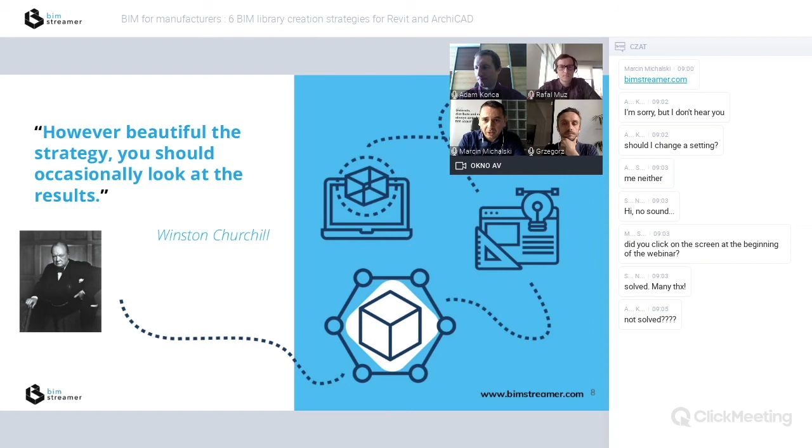Ladies and gentlemen, on this particular webinar we're going to show you the results. But before we do that, I would like to structure the information we're about to share with you, because we are going to present quite a lot of information. So before that, we'd like to tell you in which classification we're about to present these strategies.

First, we divided the strategies into groups. Group number one refers to content which is specific, non-geometric. The latter is geometric. I think you're more familiar with the geometric part, especially the majority of the audience. However, there is also non-geometric content, like different kinds of materials, paints, structural layers, which we'll also cover during this webinar. When it comes to geometric, we subdivided further.

When it comes to subdivision of the geometric part, we came up with two main approaches. The first is that we're using the same content for all platforms. We're focusing on Revit and ArchiCAD today, but some strategies can also work with other platforms like Allplan or Vectorworks. But let's focus on Revit and ArchiCAD in this particular episode.

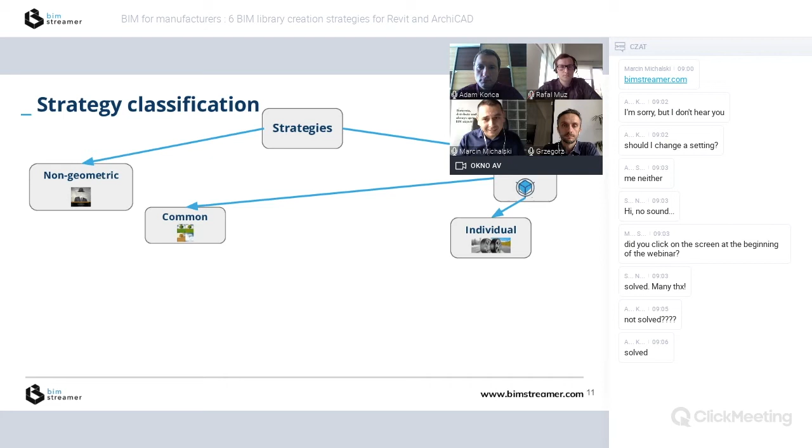The latter subcategory is individual - these strategies prepare individual libraries, native files for each and every platform. But this is not the end, we decided to subdivide it further. So the common strategy was divided into two next subcategories: one is reused, and the other is custom.

The reused approach is when we're reusing existing BIM, or in this case CAD files, which in most cases were used for fabrication. They were created in some sort of CAD systems like Inventor, SolidWorks, Solid Edge, Creo, name it. It's possible to convert them into interoperability formats like STEP or 3D DWG, which later on, through some intermediate conversion, can be converted to BIM formats.

I also mentioned Inventor, but we decided to cover Inventor as a separate strategy, and I'll tell you why later on, not to bore you with this information when we're talking about classification. The other subcategory is custom.

Custom is when you're planning to prepare a custom model, custom content, custom object, especially for the purpose of BIM, but you don't want to prepare them in both Revit and ArchiCAD independently - you'd like to have a single file. So for this strategy, we came up with two types.

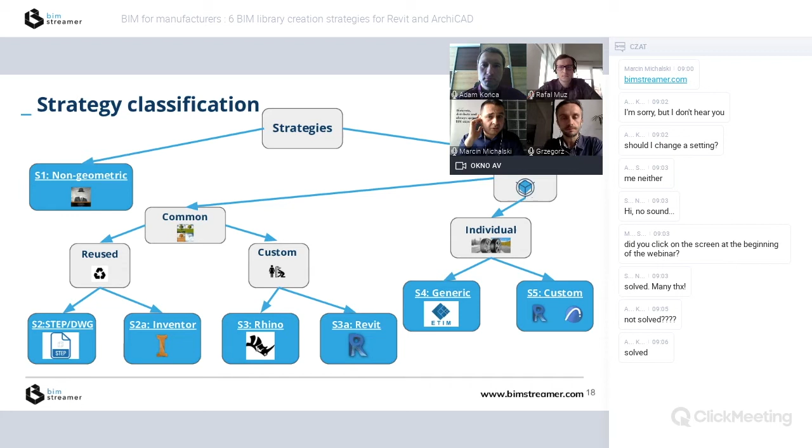Okay, so right now we're going to present the first strategy, followed by the next one - S1, S2, S2A, S3, and so on. Each strategy will first be presented by Adam, and later followed up by our experts. So Adam, I'm handing you over the stage, and you can start with the non-geometric strategy.

Okay, thank you very much, Marcin. As we heard, we have plenty of scenarios to show today. As Marcin said, we used hundreds of hours to prepare it, but we did it.

However, I'm pretty sure that you are more interested in the comparison of these scenarios. So let's go quickly through the intro. In the middle, we have the BIM Streamer platform, which allows us to combine the models and the data.

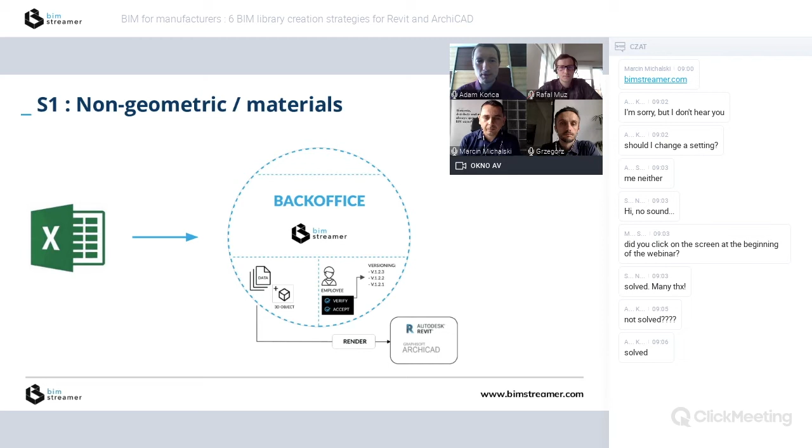In the first scenario, however, we don't have geometry. As Rafał told me yesterday, manufacturers very often call it stuff. So in this example, as input data, we have just the Excel with the data. And as a result, we have the dedicated RTE file in Revit with created materials, and for ArchiCAD with materials.

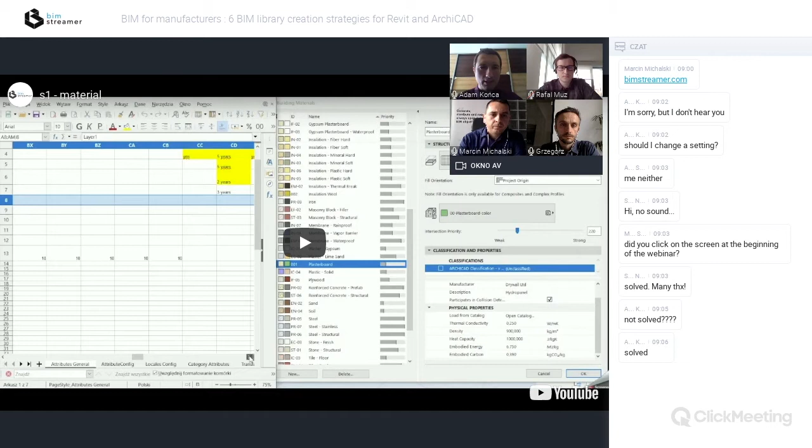Okay, let's play it. As this is the first scenario, we will start with presenting the whole process in the BIM Streamer. So we select the families for the synchronization. We can see they have been queued and synchronized. When they are finished, we are accepting them and publishing to the online library.

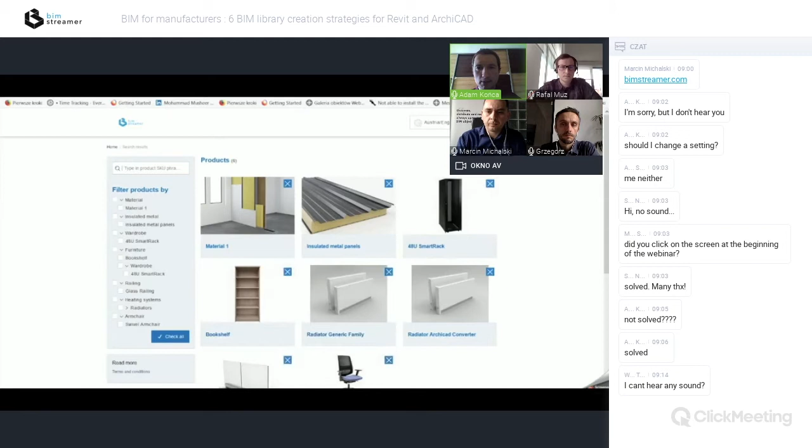We are selecting the appropriate channel, accept, and now we are on the online library and we are selecting the synchronized families and adding them to the basket. In the basket, we are selecting the Revit and ArchiCAD files for download.

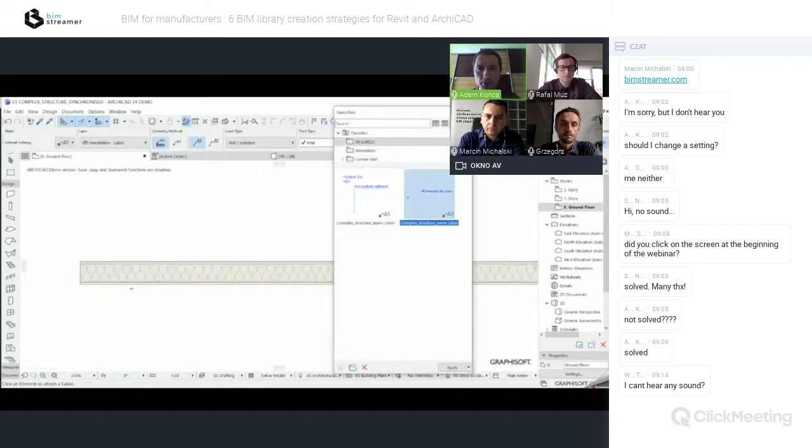And now we can see the created PLN file in ArchiCAD. And soon we will open the attributes for the created materials, and we will compare them with the data we have in our Excel sheet.

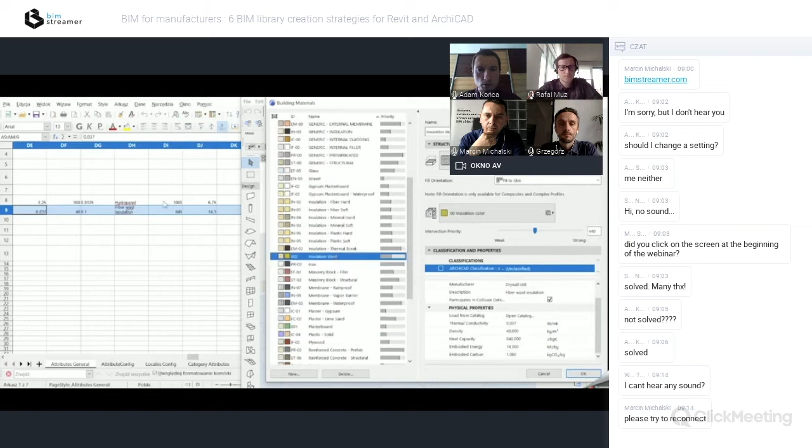You can see that the plasterboard, this is material 1, which was created. And now we are scrolling. Here are the attributes in the Excel sheet and the attributes in ArchiCAD. And the second material, insulation wool, and the injected attributes for that material.

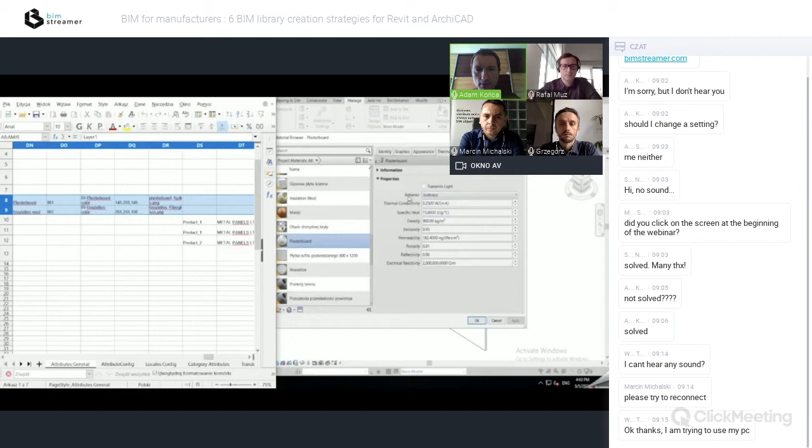Now let's skip to Revit. We are scrolling through the attributes in Revit, and soon we will see the materials. Yeah, here we have the materials in Revit - plasterboard and the attributes that have been updated. And the second material, insulation wool, and the updated materials.

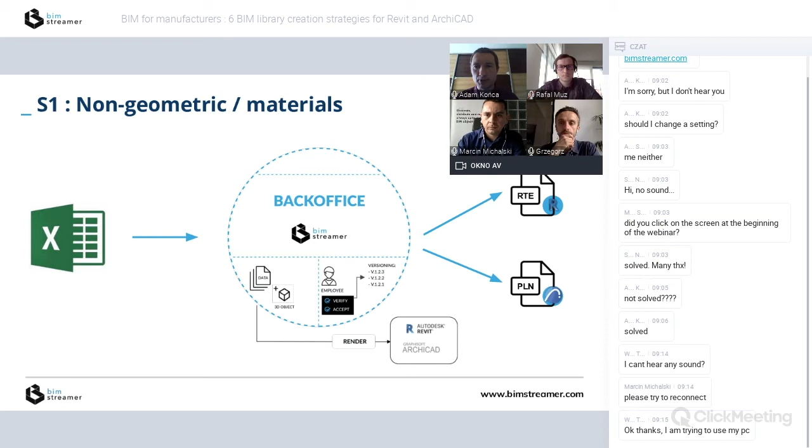Adam, if you could also clarify to our audience what synchronization is, because for some of them it might not be so obvious. Synchronization is the process in BIM Streamer which creates the BIM files. It usually takes the master models in Revit or ArchiCAD or both, and the data from some kind of source. In this example, the source of the data is the Excel sheet. However, in this example, we didn't have the models as an input parameter because we were just creating the materials, which does not require it.

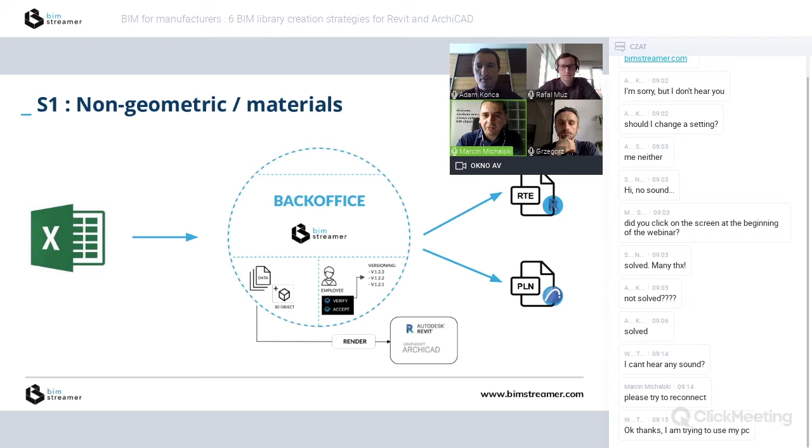Okay, so I think that this was the presentation of strategy number 1, S1, and I think it should be followed by some sort of recap from our experts. So I will ask maybe Rafał if you could put more light on the findings from this particular strategy.

Yeah, sure. So actually, for the first strategy, for non-geometric products, clearly the geometry input is not required, so that's a big plus. Only the information about a product is actually needed to create such BIM content, and it's a relatively quick solution. Some of the drawbacks - the big one is that it is very limited to a certain type of product. And which product is it?

As Adam also mentioned, for me this kind of strategy is very much applicable to everything that we could consider to be stuff, right? Materials. Think about it as paint or insulation, roofing, etc. This strategy is not very good for things that would be products - elements that I would consider to be things. Think about a door, a lighting fixture.

So basically, when we're talking about strategy number 1, I think it's worth remembering that it's a good one for everything that we measure in either buckets, liters, and bags. And it's not very good for things that we measure as either linear meters or pieces. Okay, thanks for the explanation, Rafał. I think that we can move on to strategy number 2. So Adam, the stage is yours again.

Okay, let's go through scenario number 2 quite quickly. In this example, as an input file, we have an existing STEP file. And what we can do with such a file is convert it, for example through Rhino, to SAT and 3DM files, which can be used as input models for Revit and ArchiCAD.

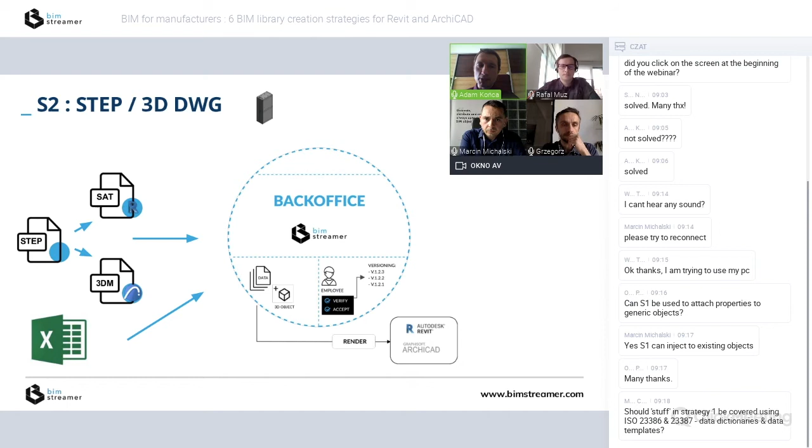SAT files might be converted automatically in Revit to RFA during the synchronization process. However, there might be some kind of issues during such conversion. So we recommend doing this conversion manually and preparing this RFA manually just to check and be sure that the resulting master model in Revit is good enough.

Similar to the other scenarios, we will have the result files in Revit and ArchiCAD. In this example, it will be RFA and GSM.

Marcin, if I can ask you to start the movie number 2. I'm trying right now, give me a sec. Let's start movie number 2.

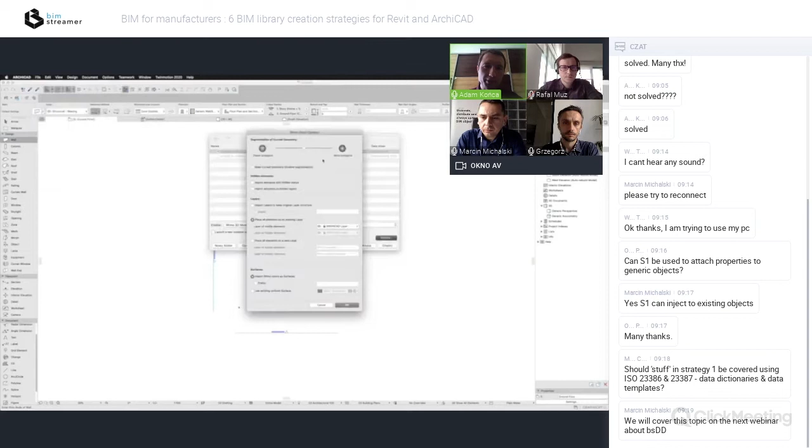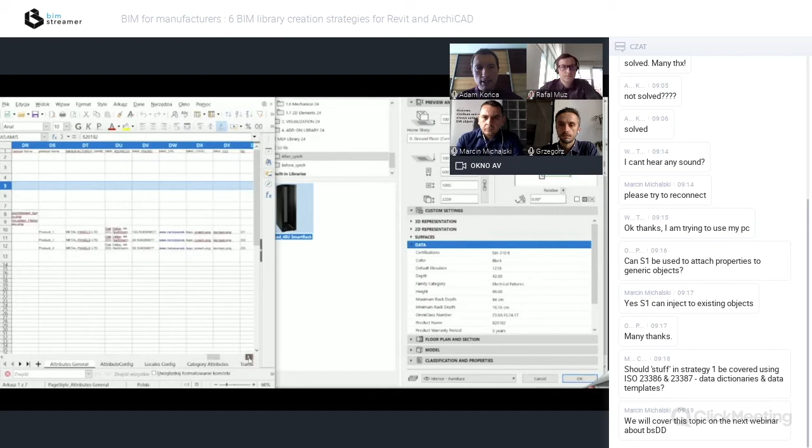Such created files we are using for the synchronization. Now we jump to check the result file after the synchronization, and we are checking the attributes in Excel file, and you can see that attributes in ArchiCAD were injected. Now we are comparing the Revit file, and you can see that attributes have been injected to the dedicated sections in Revit as well.

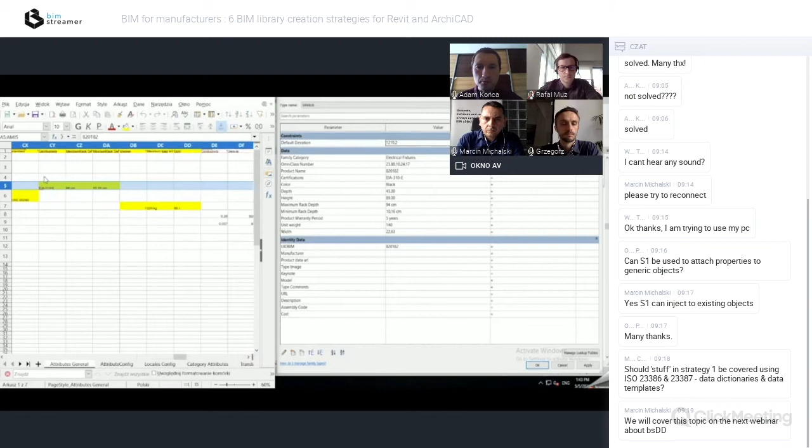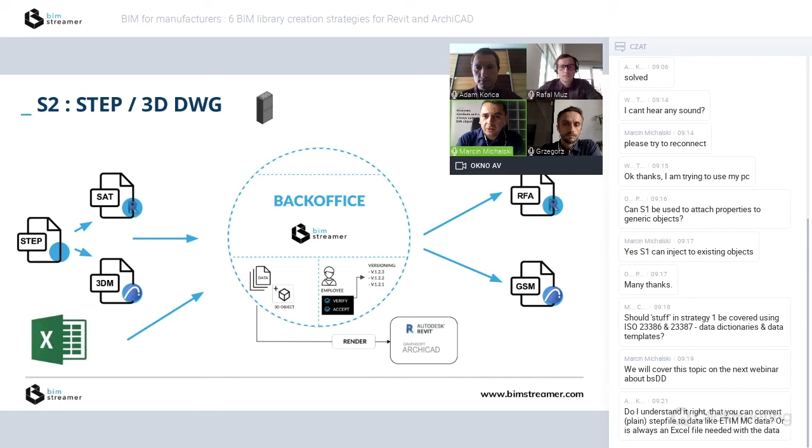I think that's all, we can get back to the presentation. Okay, so I think that was more like the presentation of the strategy S2, and maybe now I would like to ask for a comment of Grzegorz, if you could put a bit more light on this strategy.

Yes, well, this strategy uses the step files, which are typically used as an exchange format, and they are good for covering many exchanges between designing platforms. In some way this is the first format when the manufacturer decides to create the BIM content. This is the first asset they have from their design department, and very often when we start to talk about creating BIM content, I can hear that, okay, we have 3D files, can we use them?

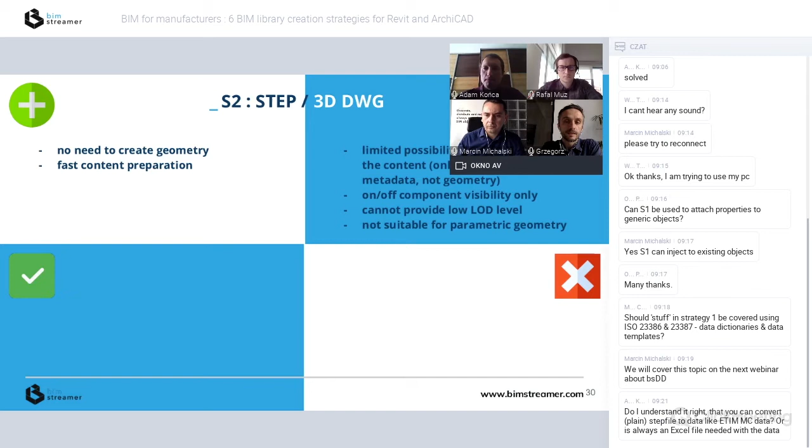And the step file is the solution that could be this first step with creating this content, so it is possible to create it in short time. We can create the first BIM content, so there's no need to remodel it. But the problem with this approach, as well as with 3D DWG files, is that we cannot do much about parameterization of such models.

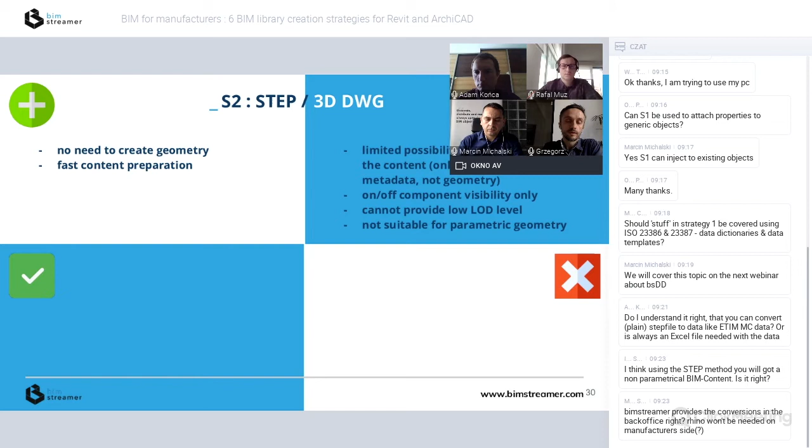And another thing is the limitation. Very often those files are very complicated, since they are fabrication models. They have many construction and structural elements that are irrelevant from the point of view of the BIM authoring tool user. So very often when you create a Revit family or ArchiCAD library part, it appears that it's very heavy, might be as heavy as half of the whole project.

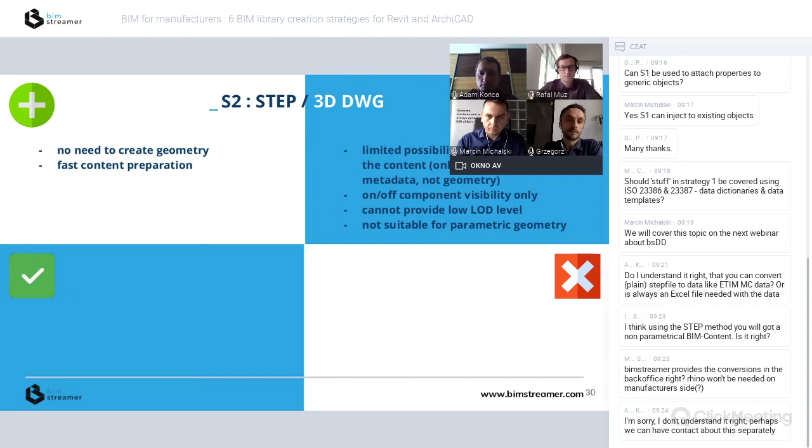The other thing with the limitation is that, as I said, we cannot do much about parameterizing this, except for simple material changing or turning on or off some part of geometry. But we have to do it either in some middleware or directly in Rhino. Anyway, we cannot directly import it to a BIM authoring tool, we need middleware software for that.

So it's good to be used for object types like furniture and interior equipment, which are in fact static, and the only parameterizing that is relevant in those cases is changing materials and showing on and off some part of elements. But mostly furniture is that type of object that we got as separate types, and we don't need to stretch them or have any other functionality, and definitely these elements are...

Not very good - of course, everything can be used as anything else, but we are talking about the best solution, and it doesn't fit well for MEP components, especially because with MEP models it's important to have really lightweight models. And of course, there will be no interactive connection points either in ArchiCAD or in Revit platform. Also, as I said, since there is no parameterization and interactivity with these objects, it's not good for elements like structural framing, where you would like to use one element that just varies, that has parameters that change the angles or the shape to fit the design.

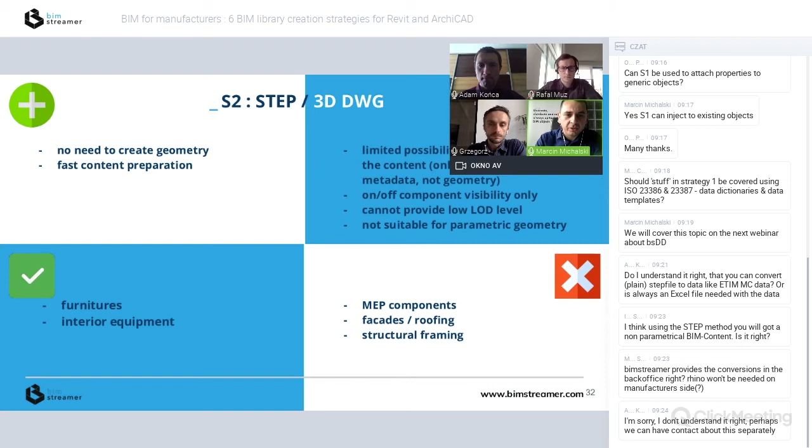Okay, thank you. I think that we need to move forward a bit, because we are already behind schedule and we have plenty of other strategies to present. So Adam, I think we can present the next strategy, if you could proceed with the introduction.

In the next scenario, we have the Inventor file as an input, existing IAM file, and we can use Inventor to convert it to Revit. This scenario will cover only the Revit case, so we are converting the IAM to RFA, and as a result we have the RFA with injected data.

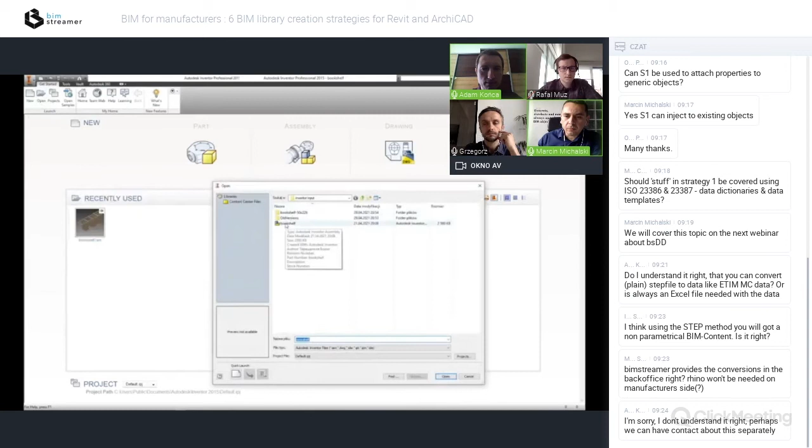Here you can see Inventor, and we are opening the existing IAM file in Inventor. We are checking some settings and options, and we can export this file to ADSK format, which is the internal Autodesk format that can be opened in any Autodesk tool.

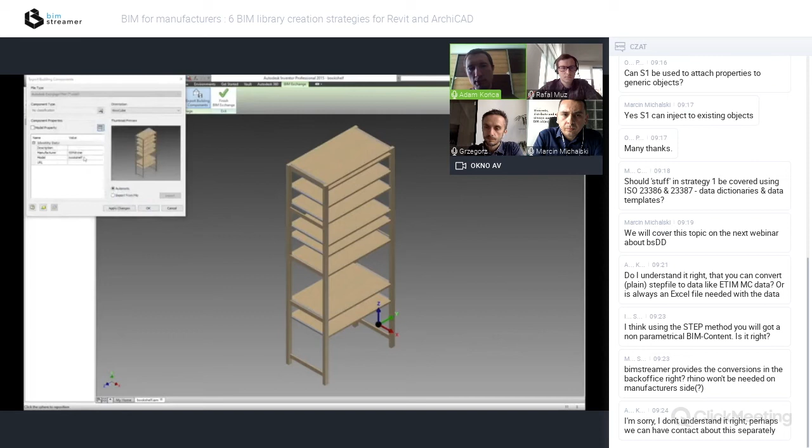So this ADSK file can be opened in Revit and saved as an RFA file. And such a created RFA file is used as the master model in the synchronization process.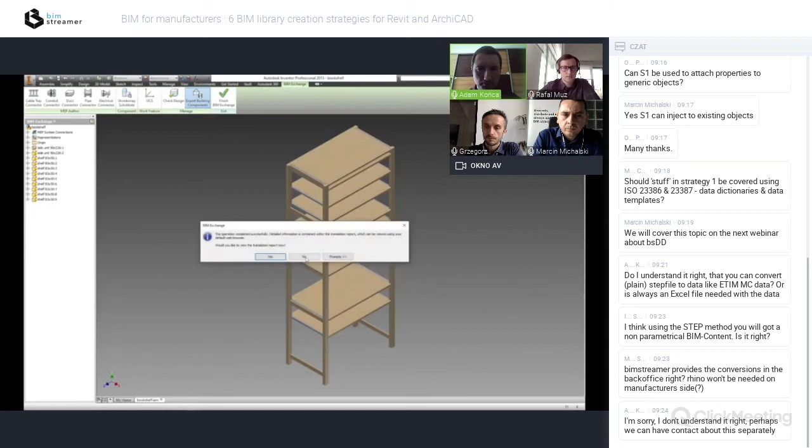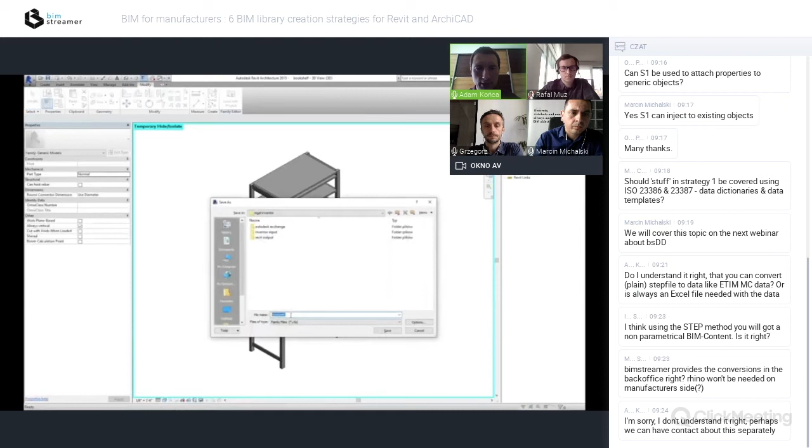Here we can see that the file is still saving. Some warning. And now we are opening the created file, and we will be checking the attributes in a moment.

Here are the attributes that are in the Excel file, and you can see that they are already injected in the final Revit file. That's all for the demo for scenario 2A.

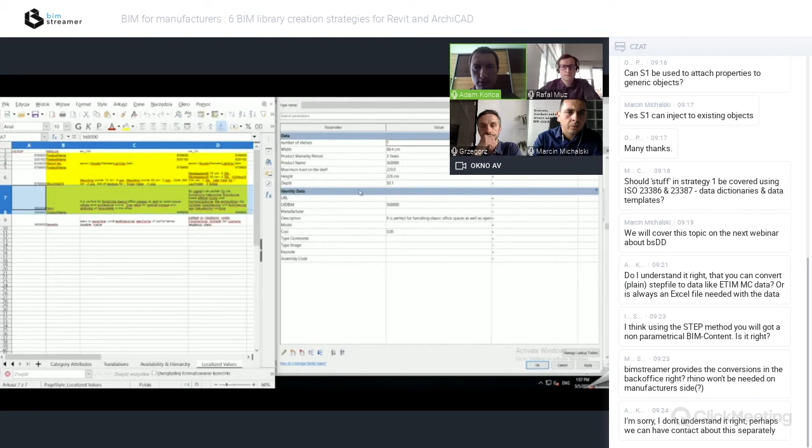I think before we continue with the summary of S2A, we have several questions that we should ask from the audience.

So question number one referred to ISO 23386. As I mentioned in the chat window, we will cover data dictionaries and data templates in the next webinar, which covers the BSDD topic.

When it comes to another question related to STEP and the ETIM MC, I think it was already answered by one of the participants: the step after conversion is non-parametric, so the ETIM MC will not work with STEP. It makes more sense to extract the data from STEP and inject it in the MC compliant data model, which we'll cover in one of the next strategies.

The next question is whether BIM streamer provides conversion into back office. Right now, not necessarily - in general, BIM streamer is connected to external tools. So the answer is yes, because both Revit and ArchiCAD support conversion from either 3DM or from SAT, which can both be generated from Rhino.

What about SolidWorks to Revit? When it comes to SolidWorks to Revit, you go through STEP, so strategy number 2.

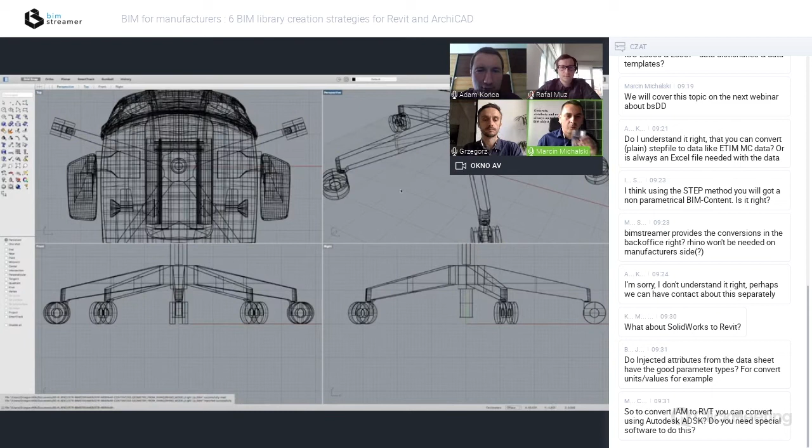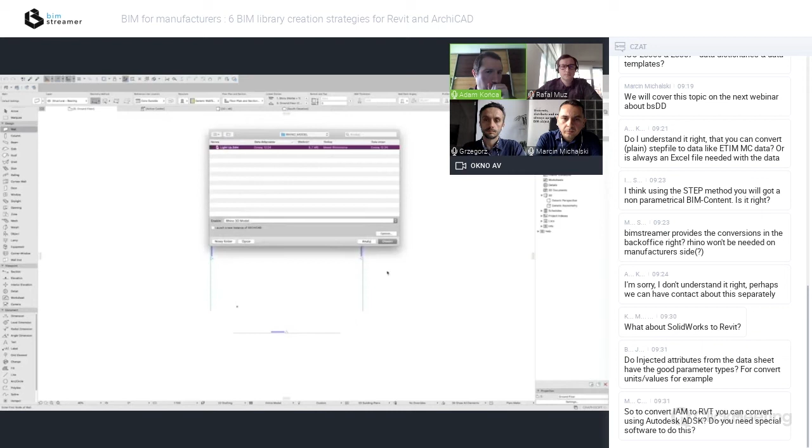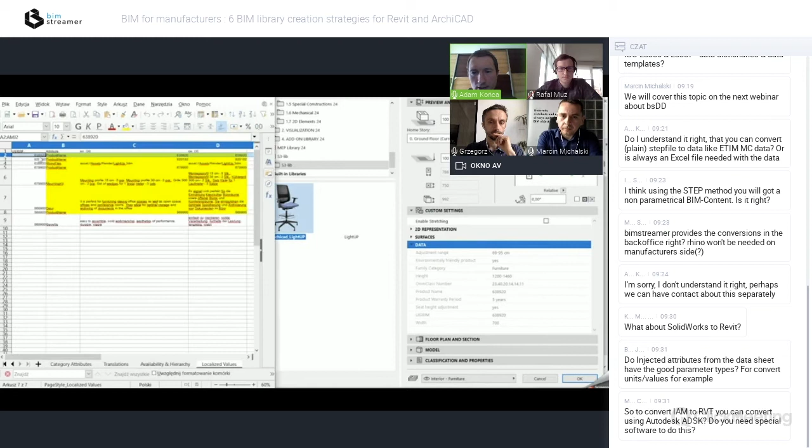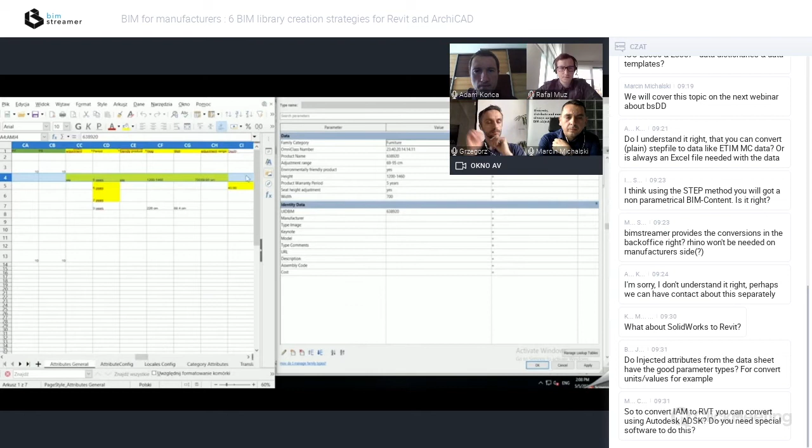This is the screen you have already seen, the Rhino tool. We are opening the existing 3DM file, and we are reducing the number of polygons to have the file a little bit lighter. Then we have saved it to 3DM for ArchiCAD and SAT for Revit. Now we are checking the results file and the attributes, if they were injected. Here we can see ArchiCAD and the injected attributes for the section data. And here is the Revit file and the attributes injected to Revit for the section data.

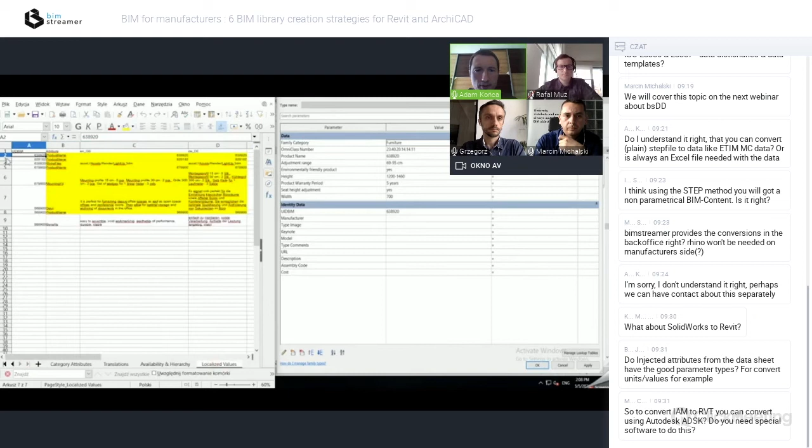And I think we can go to the pros and cons. So maybe this time I will ask Grzegorz if you could put more light on the pros and cons of this particular Rhino strategy.

Well, this case is interesting from the point of view of creating multi-platform libraries, since we have one modeling tool, and then we can spread it to different BIM authoring tools. By BIM authoring tools, I mean Revit, ArchiCAD, Allplan, and others that we don't mention in this webinar. This solution, when we use Rhino as a modeling tool, allows us to then convert it to any other specific BIM authoring tool.

So this solution is very convenient, and Rhino as a modeling tool has many options of input and output formats. That's why we use it in this previous case, since we can read STEP files or DWG and output them. Also, because it has a scripting environment, it allows us to create simple yet functional scripts that can automate the process of preparing models for exporting to ArchiCAD or Revit. In this case, for example, we can create simple LOD models like bounding boxes that can then be used in BIM authoring tools as options for displaying the model.

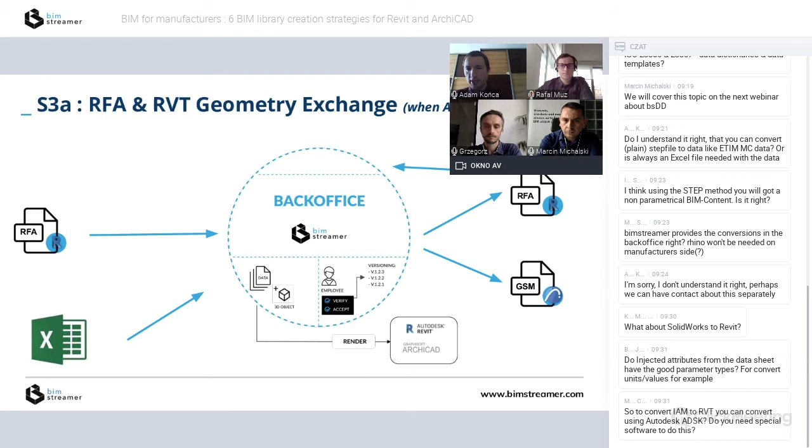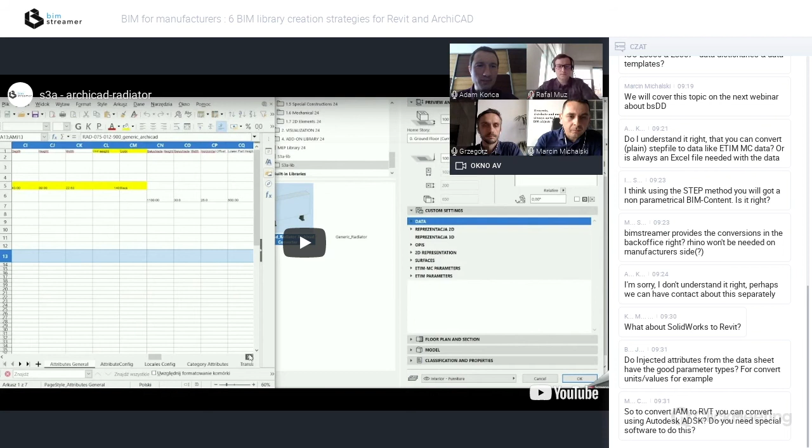Marcin, if you can, here is the movie. Let's start it. Don't ask how I knew which movie I should play.

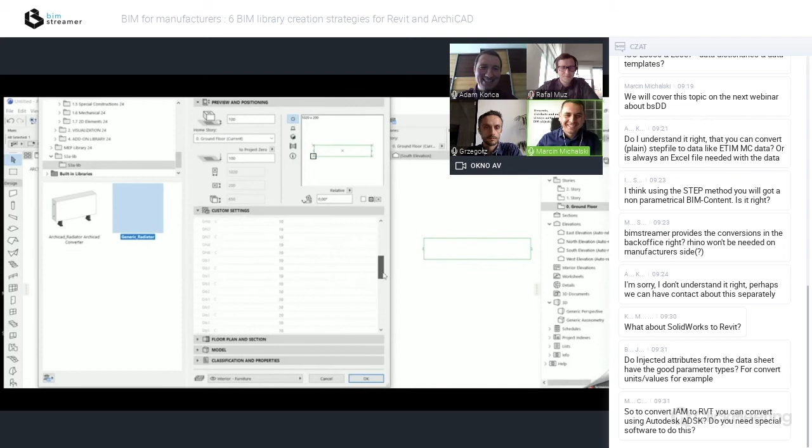Here you can see the converted master model in ArchiCAD, and the second object is after the synchronization. The first one had just the ETIM-MC attributes that were in the master Revit model, and here in the resulting ArchiCAD file you will be able to see two sections: ETIM-MC parameters, which will be updated, and additional ETIM parameters, which were injected during the synchronization process.

Okay, shall we proceed to the summary, or would you like to present something else?

The tab has been clicked, so we can see the attributes in ArchiCAD, and now we can go to the pros and cons. I think that the best person to answer for the pros and cons of the ArchiCAD converter is actually Grzegorz, our ArchiCAD expert. Grzesiek, if you could put more light on that.

This RVT RFA Geometry Exchange plugin add-on for ArchiCAD mainly gives designers the possibility to link RVT models of whole buildings, so you can link the model and see entities like walls and slabs and compare them to your design in ArchiCAD.

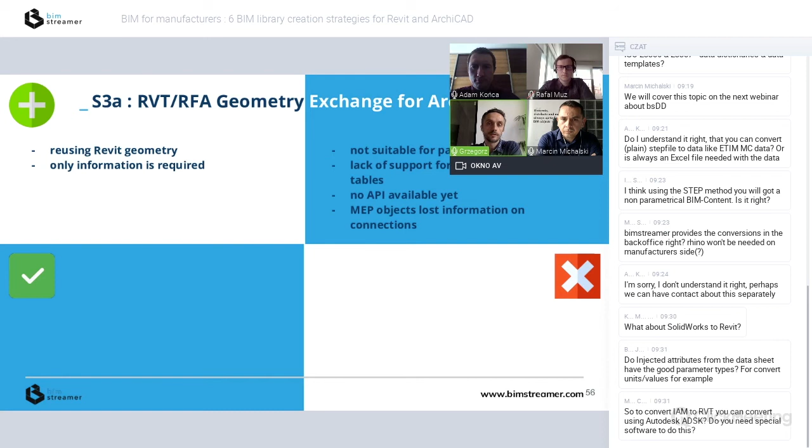Also, if you have MEP object families in Revit, you will get that information, but you will lose the connection point, so you cannot use it as a component for MEP modeler.

But what is good with this is that you definitely get this metadata. If you have metadata parameters in the Revit family, you will have them in ArchiCAD after this export. So it's good as a static object.

It's good just for furniture and equipment, because we have three options for importing elements: we can import as objects, doors, or windows. ArchiCAD will recognize it as a door or window if we import it this way, or as simple geometry we could use in this case. Also, if we have curtain wall panels, we can change its type in ArchiCAD to curtain wall panel and use it that way.

So definitely it will not work as an active MEP component, and it also will not have the interactivity of structural framing. Thank you, Grzegorz, for this summary.

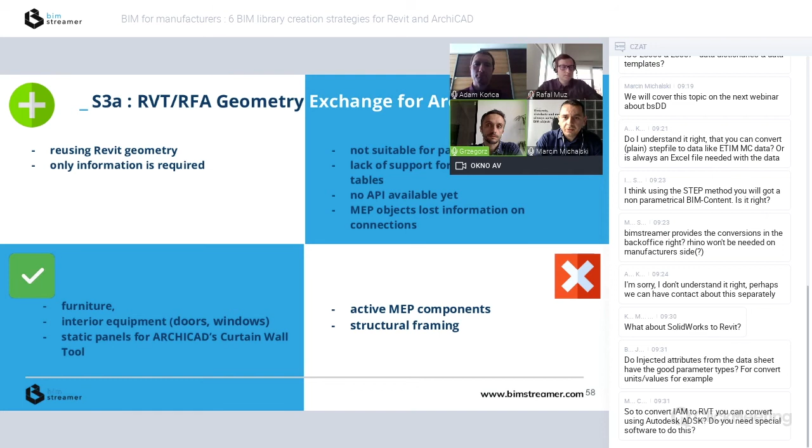Adam, we need to speed up because we have 10 minutes left. Please go ahead with the next strategy. Okay, the next strategy: generate content.

We have created the generate content in RFA, in Revit, and in ArchiCAD, based on ETIM-MC classification. As a result, after the synchronization, we have these master models with updated geometry and injected additional ETIM attributes.

Marcin, if you can start the movie, please. Let's start it.

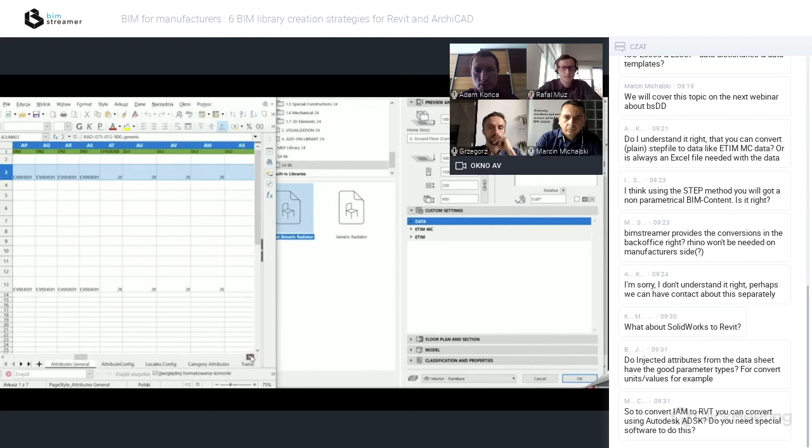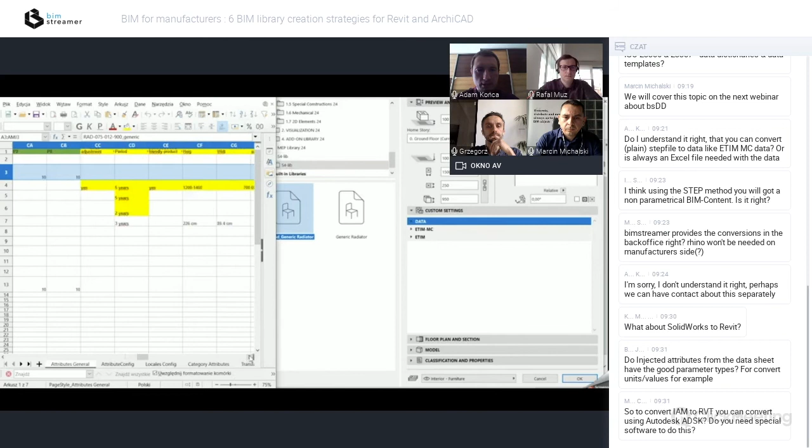Here we can see the master model with default attributes, and now the result one, where we have plenty of ETIM attributes that we have injected. You can see the sections in these ArchiCAD files: ETIM-MC and ETIM. When we open them, you can see all of this data, which is just selected in Excel. Let me fast-forward a little. Here are those attributes, the ETIM ones.

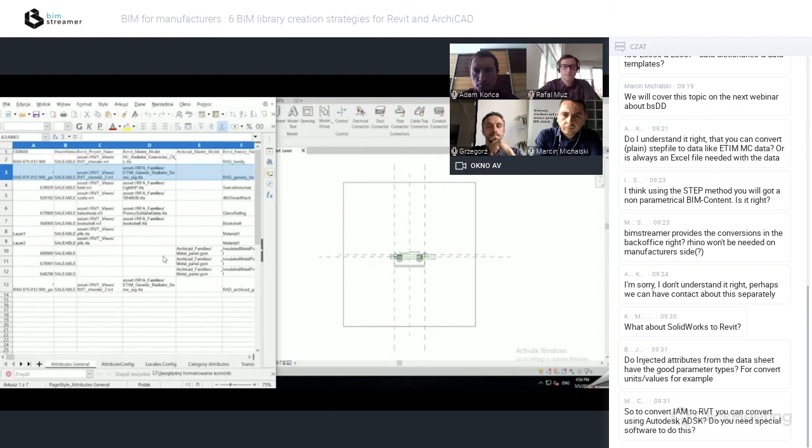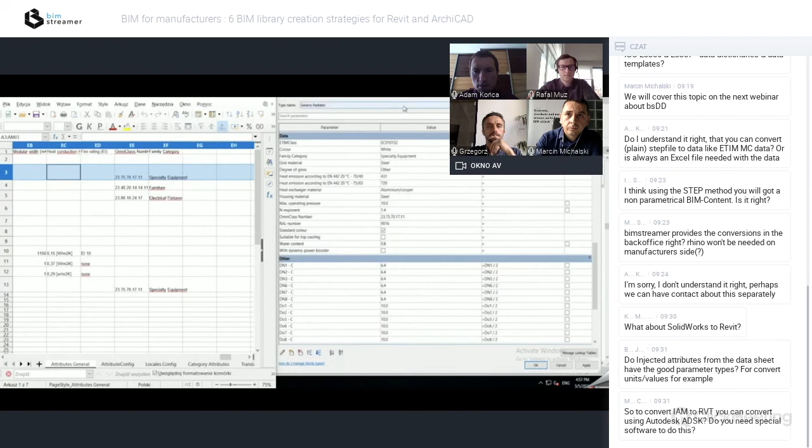And now in Revit, let's speed up. Here are the attributes for Revit.

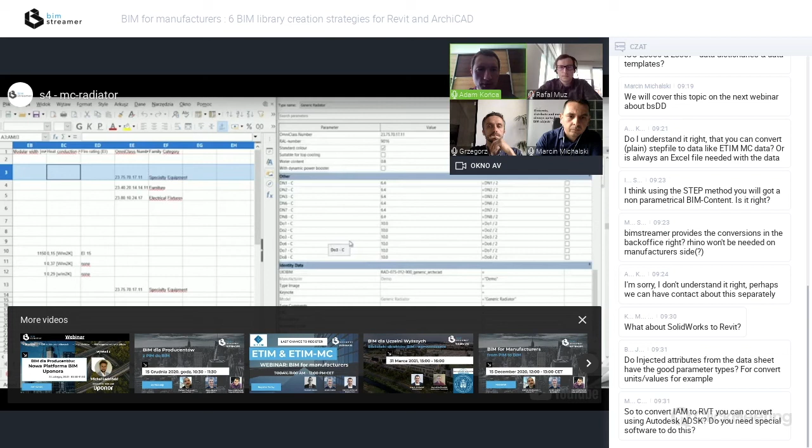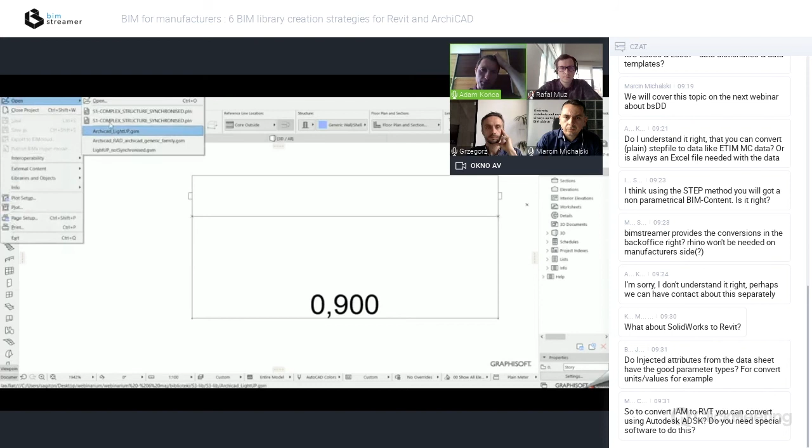Marcin, please start the movie for S4a. This is maybe not exactly connected with the scenarios, but we think it might be interesting for you: it's also possible to create drawings with dimensions, not only as PNG but also as DWG files. These, for example, are created DWG files with dimensions.

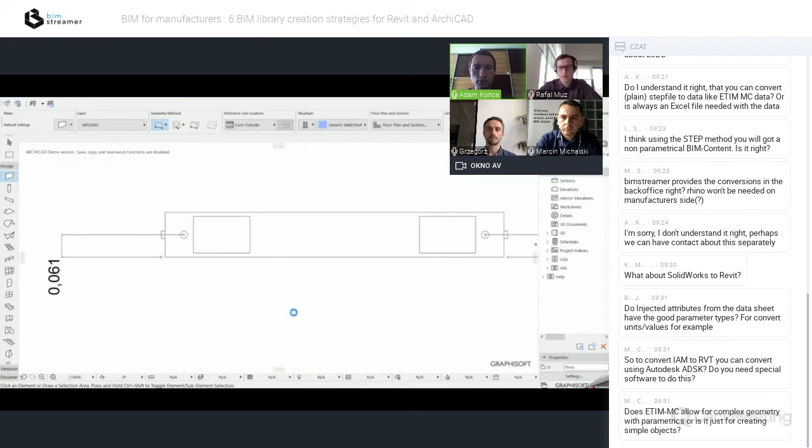So any dimension you might need can be prepared, and such files can be created automatically during the synchronization process. And I think we can go to scenario number 5, Marcin.

Okay, maybe before we do that, I will go over pros and cons. Yes, pros and cons. But maybe before we do that, I will answer the questions from the audience.

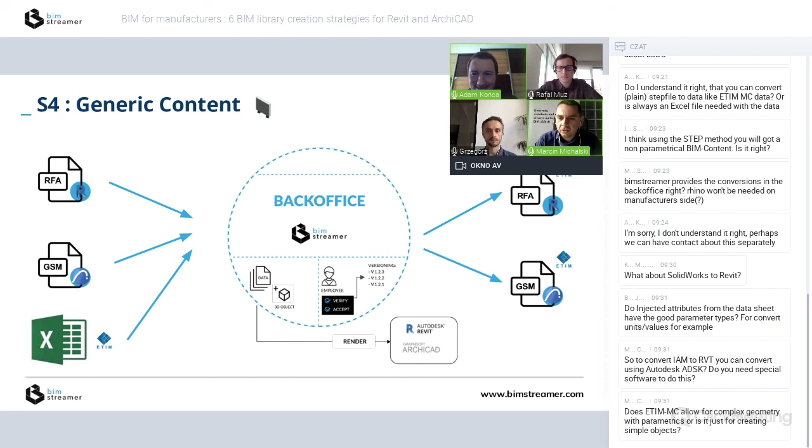Does the ETIM-MC allow for complex geometry with parametrics, or is it just for creating simple objects?

In general, the ETIM-MC has something around over 300 different product classes which are used for most typical cases. However, the ETIM-MC itself is presented here as an example, because if you need something more sophisticated, you can always create dedicated content with more sophisticated geometry settings, which later on you can steer with parameters from the outside. So the ETIM-MC gives you the possibility to standardize the content and reuse it across several manufacturers. But if it's not suitable for you and you need something more sophisticated, you can either extend the generic content or create a new one from scratch.

But let's go back to the summary of S4, and for the comment I would like to ask Rafał. Sure, I actually think my summary will also answer Matt's question.

The big pro is that it's really optimized for specific software like Revit or ArchiCAD. The time for content creation is reduced, and the library utilization is relatively proven. But of course, it does not give us many possibilities to create unique content. The best results with this approach are for a relatively low level of detail, and in my opinion, there is quite a long process of data collection on the manufacturer's side to get the data into the needed structured format.

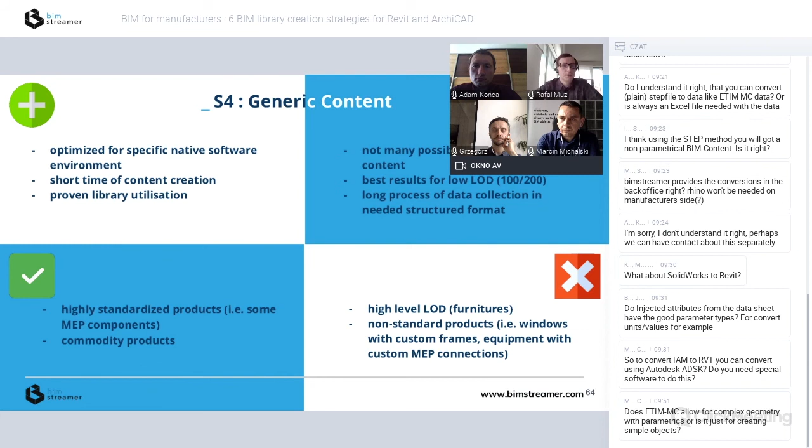Overall, I think this approach can work for highly standardized products, some MEP components like the radiator we just saw, and a lot of commodity products. But I don't think it's a very good way to go with either high level of detail elements like furniture or non-standard products. For example, if we have a window with a custom frame, most likely ETIM MC does not yet have a particular class that could deal with it. Of course, this approach is a growing approach, and maybe one day it will cover all the different scenarios. But in the meantime, non-standard products are quite difficult to create as BIM content using strategy S4.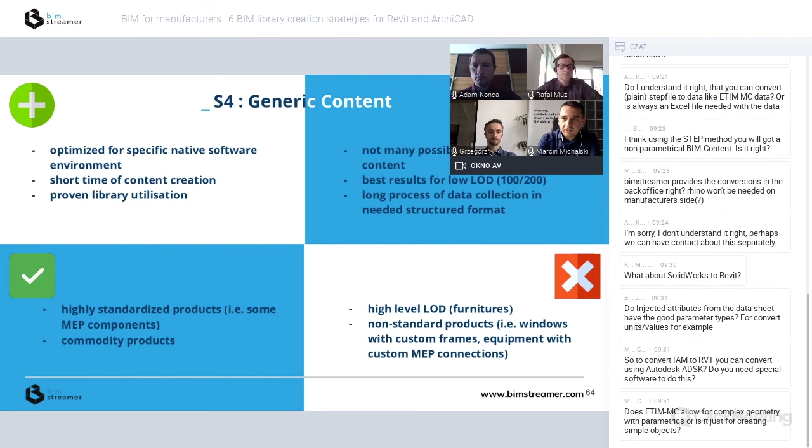Okay, thank you, Rafał, for the explanation. Adam, I think we have the last strategy. We have 6 minutes, go ahead.

Let's go through scenario number 5. From the BIM streamer point of view, scenario number 5 is not different from scenario number 4 at all, because we have the same files as an input, GSM and the data in Excel sheet, and the same result, RFA and GSM. So this is completely the same from the BIM streamer point of view.

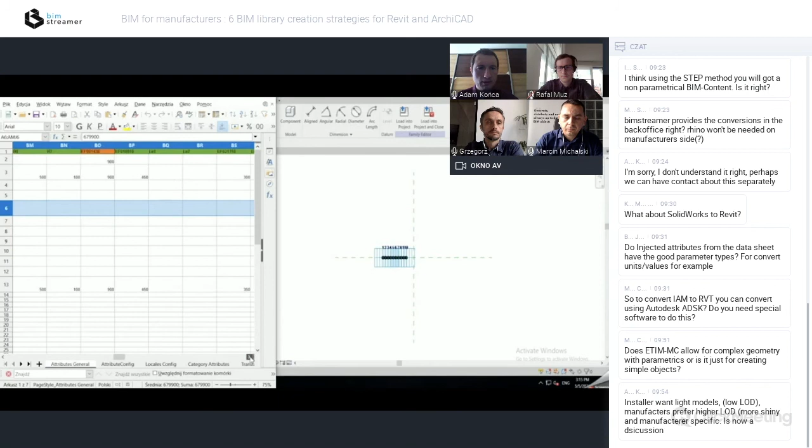Marcin, if you can run the movie. Yeah, go ahead. Revit 1 - maybe I'll speed it up because this is just the comparison of the attributes. So here is the data in the Excel, and here we can see the injected attributes in Revit.

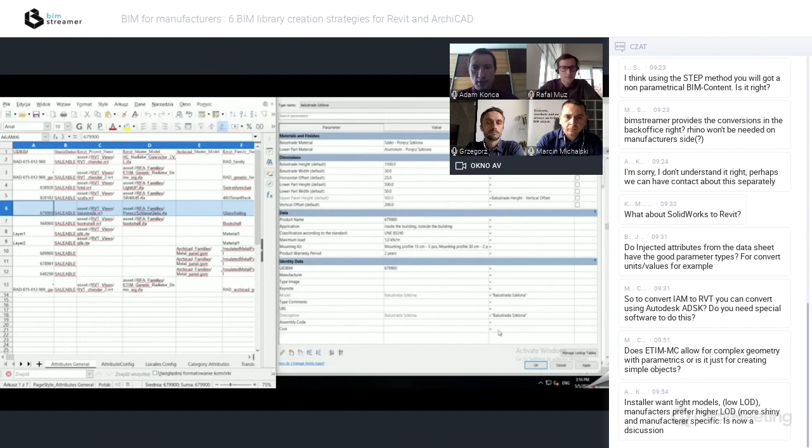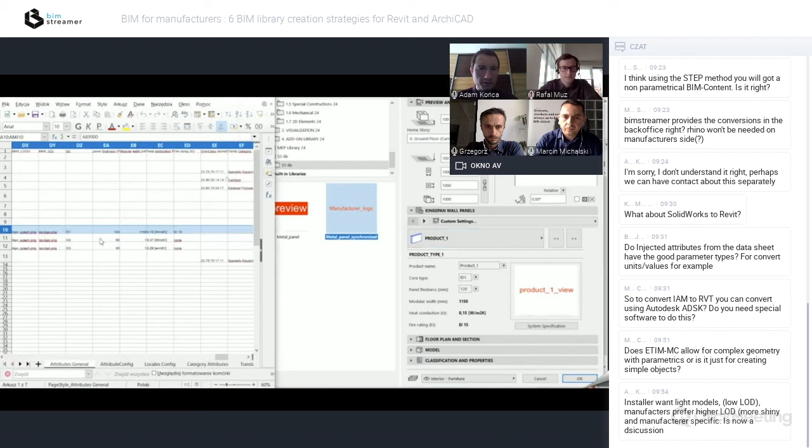And we can play the movie for ArchiCAD because we have a different product. Let's fire it. We can see that the attributes have been updated. Here we have Excel with values, and here you can see that the values in ArchiCAD have been updated as well.

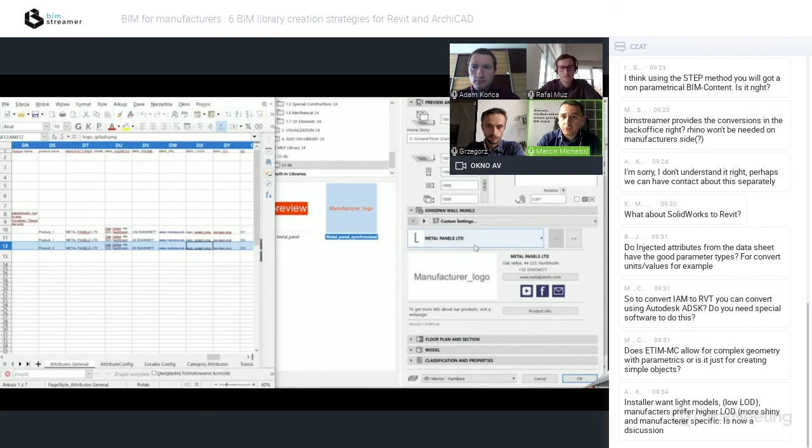Okay, thank you. So maybe for this comment, due to the fact that we're creating custom content for each and every platform, maybe I would ask both of our experts. Rafał, if you can start.

I think this is quite the most common strategy for all the manufacturers. That's something we see quite often. It is highly optimized for a specific software environment because we are starting in Revit to end up in Revit, or in ArchiCAD to end up in ArchiCAD. It of course has the highest possible adaptability. But of course it creates a situation where it takes a little bit longer. It often might cost a bit more money to generate. The automation is a little bit reduced, and just like everything we do customized, there is a slightly higher probability of having bugs or mistakes inserted into the content than when using generic content fed by data collected in a standard way.

I'll give it to Grzegorz now to say what it's good for and what it's not good for.

Well, in fact, it's good for everything, since we start in native environment, either Revit family creation or creating GSM objects in ArchiCAD. When you start from scratch, you can do anything. So even those simple elements we just mentioned in previous scenarios can be done natively and will work very well. But of course, as mentioned, since this process starts from scratch, it takes more time.